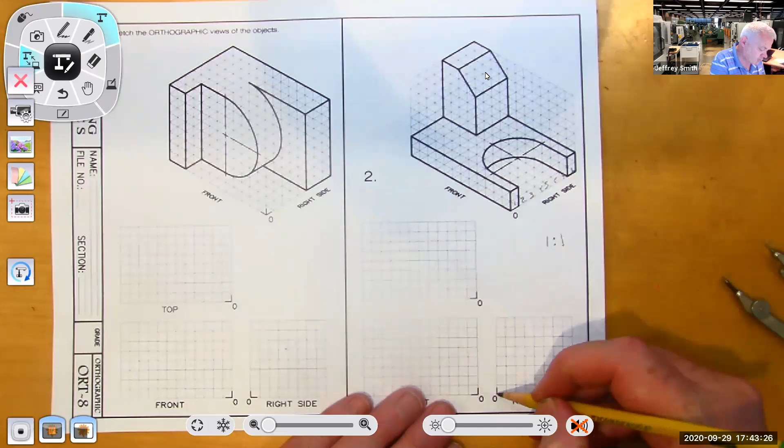So I'm just going to live a little dangerously. This is 1, 2, 3, 5, 6, 7, 8. So I'm going to hand draw this. You should take your time. I'm not going to take my time on this one, as I have before. And so then I've got this, I wouldn't see any curve from this right side view. So I'll just go ahead and close this up. All right, that's that line.

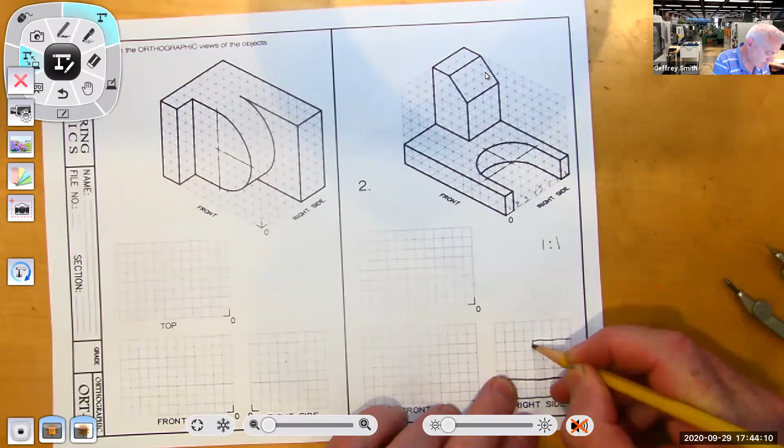And then this line, remember there's no break on a circle or radius unless it's going away from you. All right, and then this is 1, 2, 3, 4, 1, 2, 3, 4. So I'm going to come up 4. It's easier when it's one-to-one scale. So that's the right side view so far.

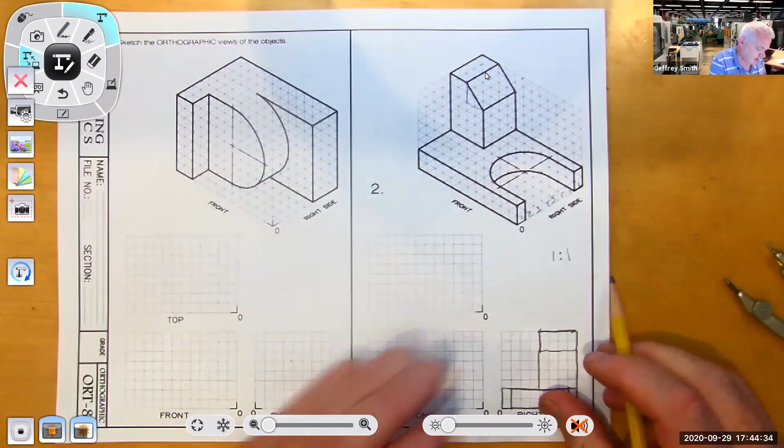And then it's got a little slope, and it actually goes up, back 1, and up, back 2, and up 2. So we're just going to draw that slope. We wouldn't see the top view here on this view. And then the last thing we'd want to do is we want to add this center mark. I do have to show this, so it's going to look something like this. And then that's pretty much all you would see here.

All right, so now let's go ahead and make the front view. So I've got this very long stretch here. And so I'm going to draw this long, it's going to encompass this whole 1, 2, 3, 4, 5, 6, 12. All right, so I'm going to go all the way across.

And then I'm going to draw this little, it's like a barge scooping up trash on the river. That's what this is. All right, so we got the little driver in here. And he's steering his rig. All right, so a little driver in here on a seat. All right, so that's what this is. I know you're all curious about that. And so he's scooping up all the spare tires on the river, all the trash that Jake threw out when he was done, and little cans of whatever and buckets, and so it's a scooper upper. All right, so just moseying down the river.

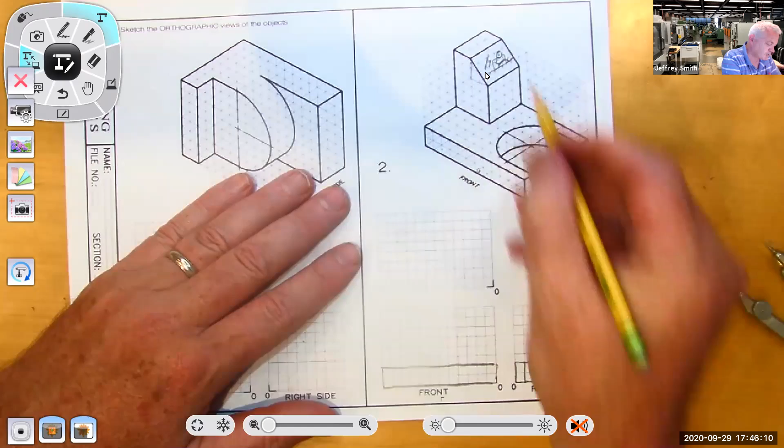Let's go ahead and draw this cabin. So I'm going to come up here to the top. I don't even need to measure if this is right. I'm just going to come across here. It goes over 2. And then there's the glass. It goes down 2 and over 2, like that. And then it goes all the way down to the boat. There we go.

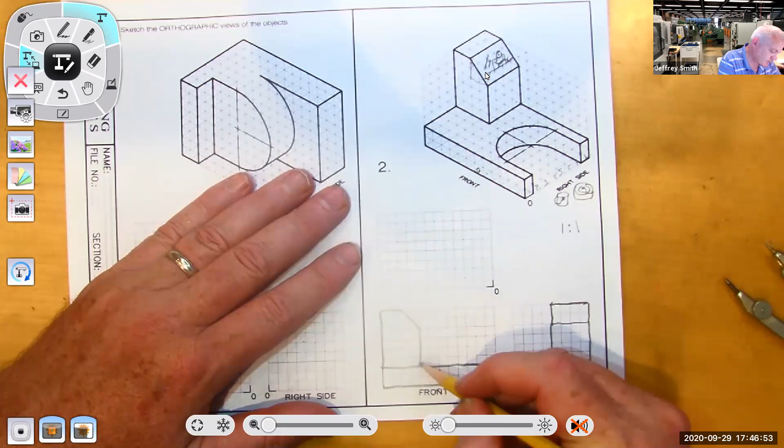All right, now I need to draw this little center line of this radius and this little hidden line. 1, 2, 3, 4, 5, 6. 1, 2, 3, 4, 5, 6. So that's where it ends. And if that's right, there's 1, 2 spaces, so perfect. And then it's 1, 2, 3. So come back 1, 2, 3, and that's going to be that center line.

All right, Jake, how am I doing? Think I'm doing okay?

And again, if I had a 45-degree, what we were learning, I would just draw these things up and over, but it's already given us where this is. So I'm going to go ahead and draw this top view. So here's the top of this little, with the little controller where he's driving. So 1, 2, 3, 4. So I'll draw that rectangle. It's actually a square.

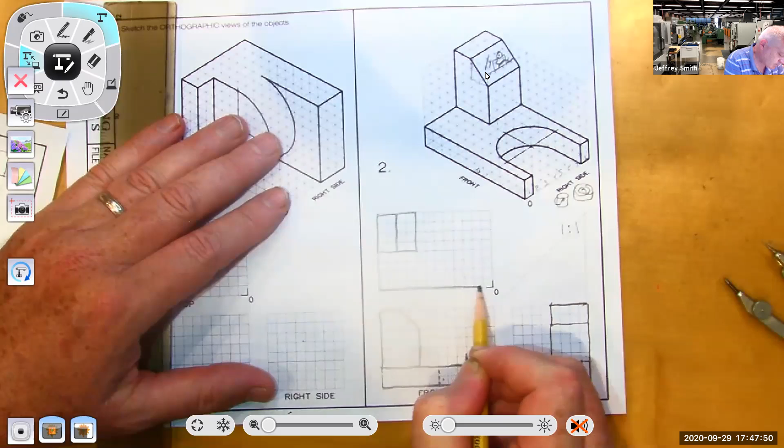And then there's a little window here. And then it comes all the way over. And it comes up 1, and then it goes back 1, 2, 3. 1, 2, 3. And that's where that radius begins. So that radius is going to be right 1, 2, 3. 1, 2, 3. So it's going to be like this.

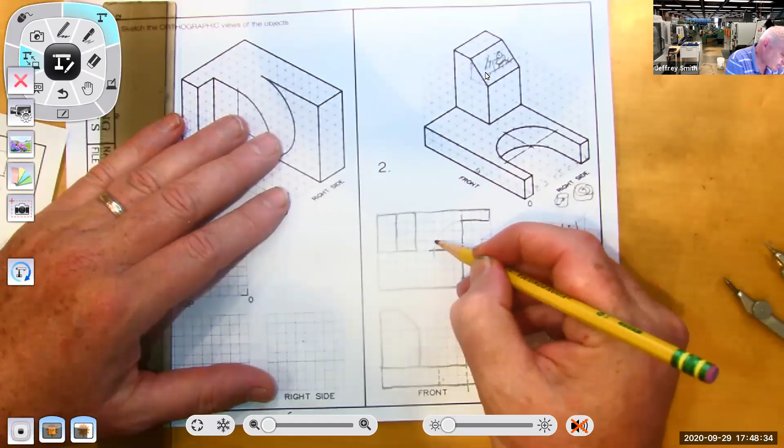And then notice you're only going to see that center mark where the curve is. And it extends beyond the curve and then it stops where there's no more curve. And this is 1, 2, 3, so no more than 3. And I'm going to live a little dangerously. You might want to use your compass. All right. Cool. All right.

Am I missing anything? What do we think? Are we doing all right? Money.